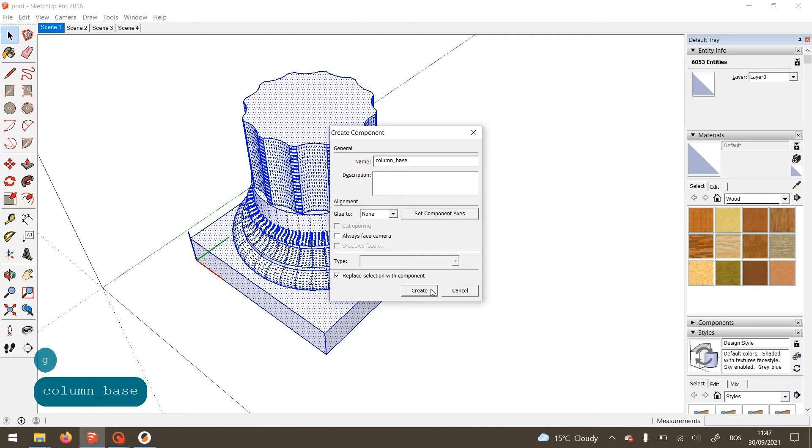If your volume is okay for printing, if it's suitable for printing, it's going to display the volume here. So our model is clean, so it can be exported to a suitable extension for 3D printing.

We will now need to export a selected component to STL file format. Before doing that, make sure your SketchUp version supports STL file export by going to File, Export, and 3D Model, and check if it's here in the drop-down menu.

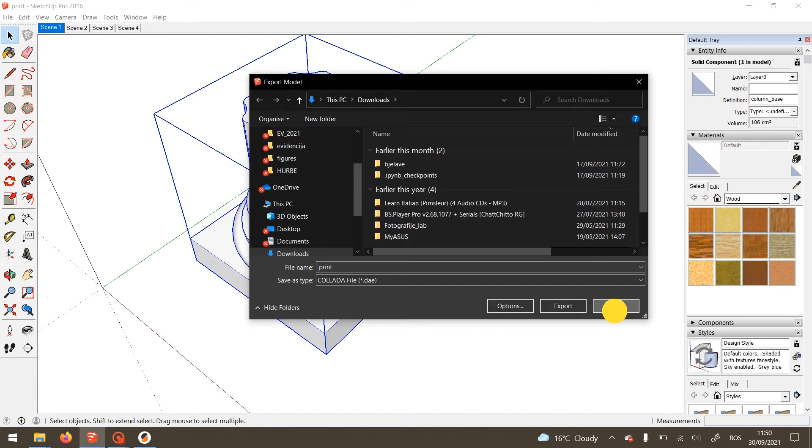For older versions of SketchUp, like this one I'm using, you'll need to install a SketchUp extension. You can do that by scanning this QR code, and it's going to lead you to the needed STL extension for SketchUp. After you install it, you will get the Export STL option here.

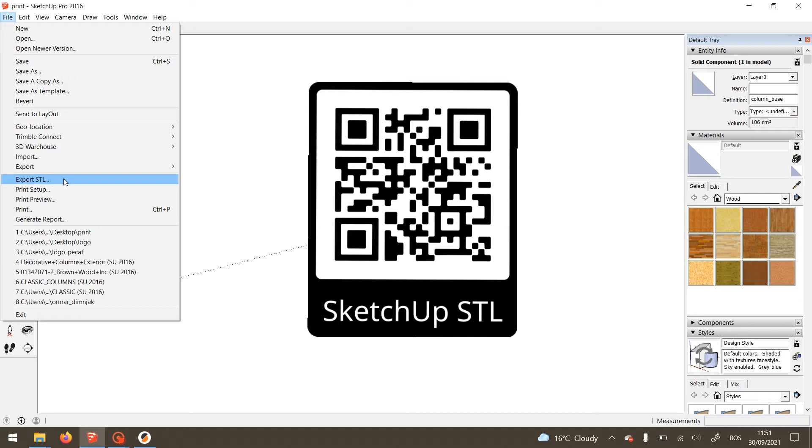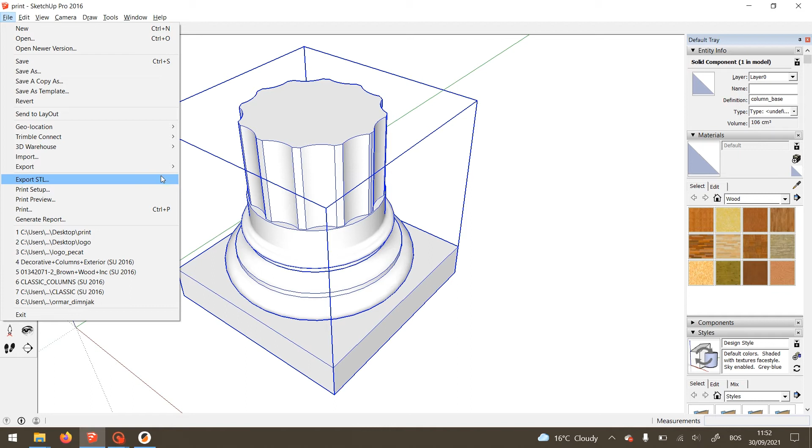After you install the extension, you select your component or the volume you want to export for printing, and then choose Export STL or Export 3D Model and find STL under the drop-down menu. So export STL, export only current selection.

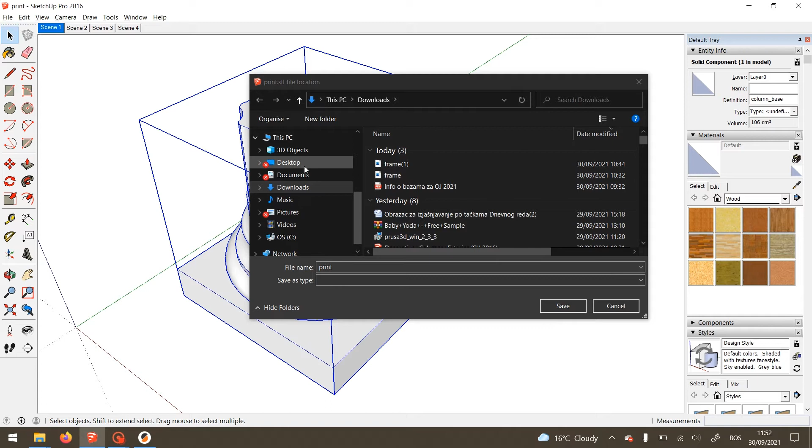We are going to export the volume that is selected. Leave all of these parameters as they are, and then click export. So you can save the file.

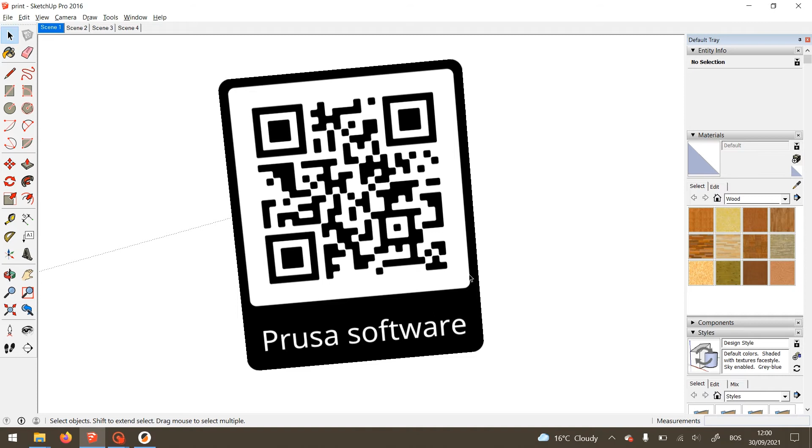After exporting the STL file from SketchUp, we'll then need to install Prusa Slicer software. You can find it here on a link by scanning this QR code, and then we're going to switch to Prusa Slicer, which is actually software for preparing our STL files for the 3D printer.

First of all, we import the STL file, and then we check the printing options. Our printer is Prusa MK3S Plus. You can find it here in a drop-down menu.

We're going to print it using PLA filament, so it's going to be PLA. And our printing quality is going to be 0.2 millimeters quality print. After we set that up, we click here on Slice Now.

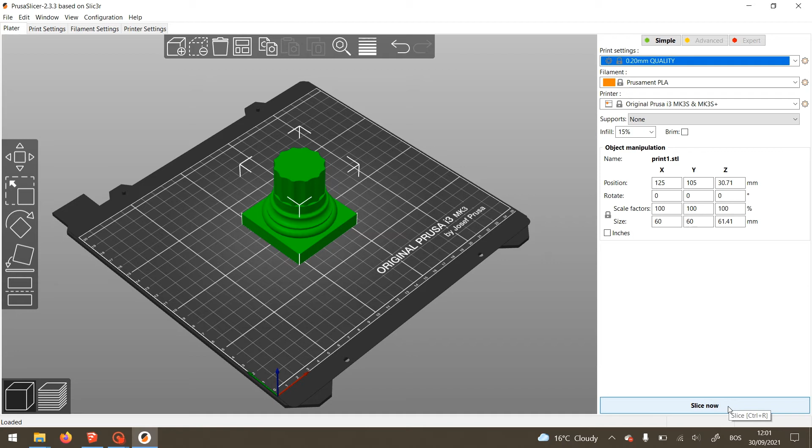So the software actually simulates the printer working, and defines different parts of the 3D model and estimates the time required for printing this model. If everything is okay with our model here, and if we are satisfied with all of these parameters and printing time,

we can then click here and export G-code, save it to our maybe desktop, and after we save it to our computer, we can copy it directly to an SD card and print that file from the SD card on our 3D printer.